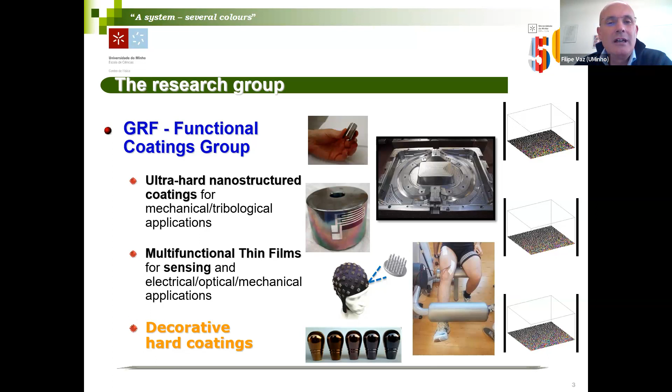And last but not least, I mean the main issue for this talk this morning, the decorative hard coating. This was one of the first subjects I studied in my career, and this morning I will tell you a few things about what we are doing in decorative coatings.

Well, we all know that decorative coatings are used in several different applications. It goes from cutleries in kitchen equipment, from door handles, whatever. And recently, there is a huge demand in terms of electrical-based applications. Whenever you are putting your switch on and off, there are some coatings, not only for decorative purpose, but also to functionalize the material, the plastics. So there is a great potential for decorative coatings, and of course the most well-known are wristwatch cases, watch bands, eyeglass frames. We all know these kind of applications.

There are several examples on the market. And of course, there are some characteristics that we need. They have to be attractive, with different colorations, but they also have to be hard and adherent, because we need the coatings to support high mechanical efforts.

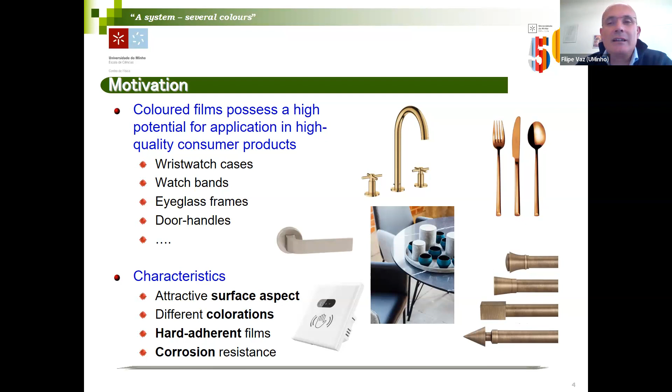And last but not least, corrosion or oxidation resistance. It doesn't matter if you have a very interesting coating with a very attractive color, in the end of the day, if it doesn't stand corrosion or oxidation.

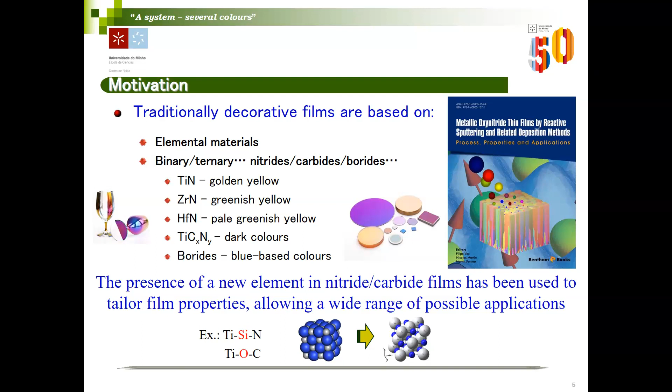There are several examples of decorative coatings. It all started more than 30 or 40 years ago with titanium nitride, but also zirconium nitride, hafnium. Then, in the late 90s, people started adding other elements - titanium aluminum nitride, titanium silicon nitride, titanium oxycarbide - meaning that by adding a third element to well-known nitrides or carbides, you could also get variations in the properties.

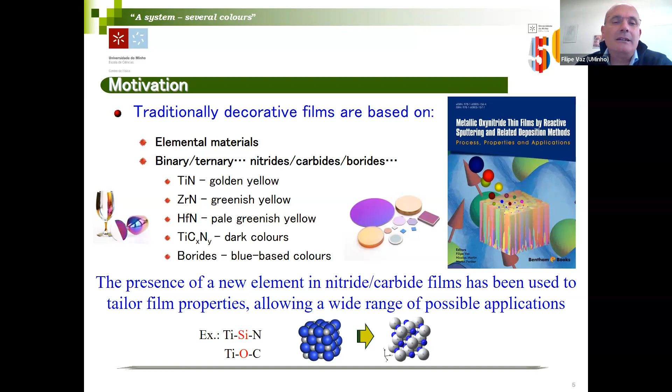Some years ago, we wrote a book, myself and two colleagues, one from France and another from Germany, giving some ideas and examples of the applications of these coatings. This morning, I'm going to tell you about some of the work we have done in a very well-known system, zirconium nitride.

and in fact, what? Sorry? Go on, Filipe. No problem. Can I go on? Yes.

So what we are doing is using zirconium nitride as a base material, and adding increasing amounts of oxygen. So what we were doing is basically going from the well-known metallic behavior of zirconium nitride towards the insulating behavior of zirconium oxide.

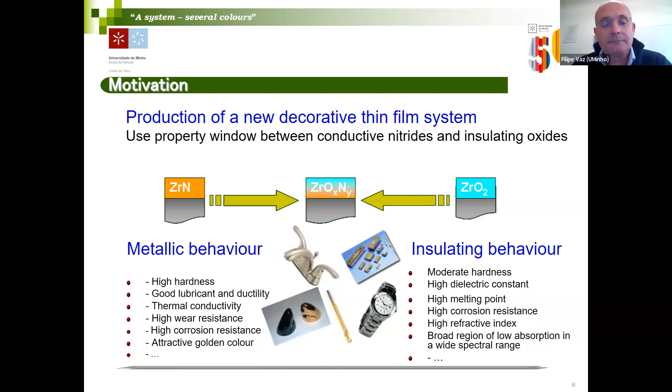What we try to do is fill up a window between two extreme materials, one metallic, one insulating. So what we did is explore everything you might have between metallic and insulating, and we were expecting to get everything between these two extreme materials, also in terms of optical properties, or in terms of color.

But what we did was always exploring one very important thing in terms of industrial applications, which is cost competitiveness. So what we use is always one target, only zirconium, and known base materials like zirconium nitride, but using a gas mixture.

Instead of using nitrogen and oxygen separately - you all know that oxygen is about 100 times more reactive than nitrogen - it means that if you put a little oxygen in the chamber, a lot of oxygen is going to appear in your coating, because oxygen is extremely reactive. So we decided to use a gas mixture.

This means we used a bottle of gas containing oxygen and nitrogen at different ratios. For instance, we used a bottle with 90% nitrogen and 10% oxygen, 95% nitrogen and 5% oxygen, 80/20, whatever. We tried different gas mixtures, but always using one gas mixture, one target, and very well-known materials, in order to get very different colors.

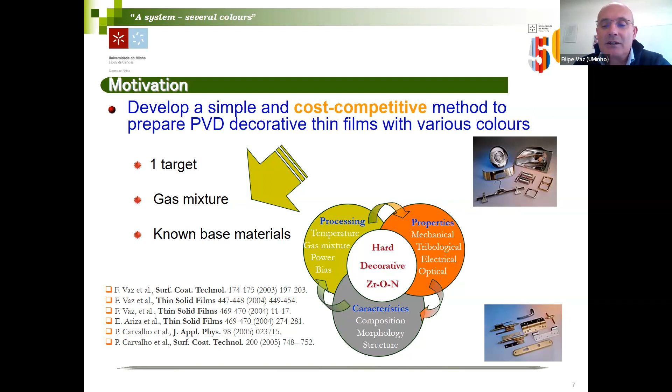And it works - because oxygen is extremely reactive compared to nitrogen, the thing worked. In terms of the production itself, just to give you a brief idea, we used very similar conditions to the ones you are using.

We could have room temperature towards several hundred degrees Celsius. Depositions were in the range of 10 to the minus 3 millibar, 10 to the minus 6 millibar as the base pressure - nothing strange for most of you, if not all of you.

But the important thing here is we were using different ratios of nitrogen to oxygen in one bottle only. So we were always using a gas mixture. And guess what - by doing these depositions with zirconium nitride, we found we could always get four different kinds of coatings.

First, a type of coating in which for very low gas flows, the colors ranged from metallic to golden - metallic when zirconium was dominant, meaning very, very few nitrogen and oxygen atomic percent.

And then golden when we were approaching the stoichiometry of zirconium nitride with some oxygen. Then with intermediate gas flows, we could always get colors ranging from golden to brownish and very dark brown.

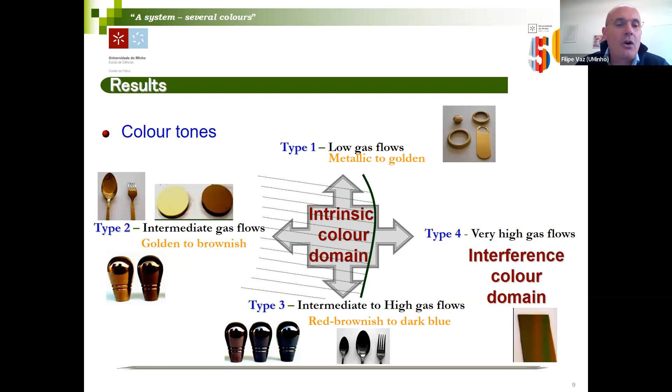Then a third type of coating where we were getting red-brownish towards dark blue, very dark, even close to black. And for very high amounts of oxygen, very high gas flows, we were getting interference colors in the coatings. So this was quite interesting because whatever gas mixture we used, we always got these four different kinds of coatings: very metallic, golden to brown, brown to dark very dark, and then interference colors.

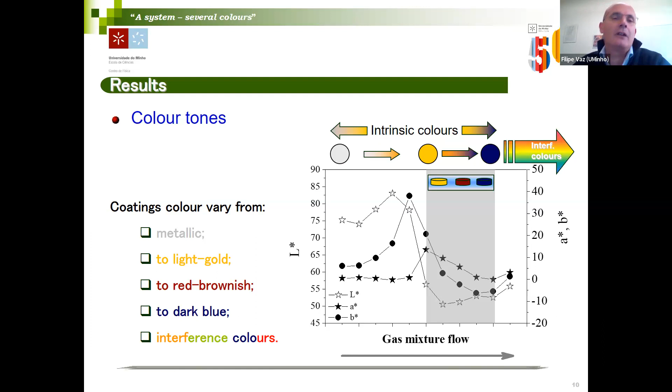You can see here in this plot the color coordinates of the coatings, ranging from metallic, light gold, red-brownish, to dark blue. It was quite interesting because you could have a very high amount of different colors, always keeping in mind we used one target, one gas mixture, and very simple systems like zirconium nitride. I'm showing you zirconium nitride, but it was also working with titanium nitride.

I can show you the four zones. There are four quite different zones of coatings. In the first one, zirconium was decreasing, the oxygen content was quite low, but the nitrogen was increasing. Then there's a zone particularly interesting, this one, where everything seems almost constant, even though we were depositing different amounts of gas mixture - this was because of the reactivity of oxygen. This second zone was interesting because we could have very interesting colors ranging from gold to brown, with different shades and tones, quite interesting.

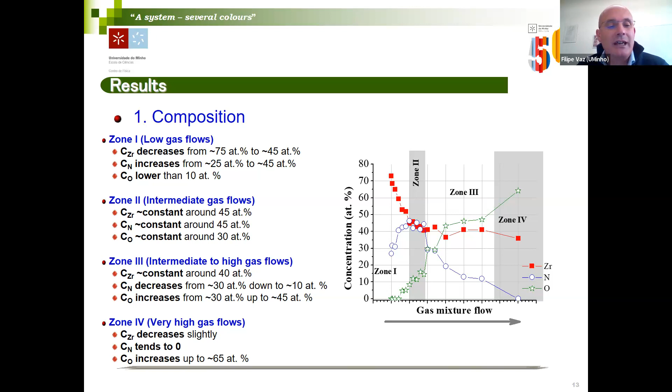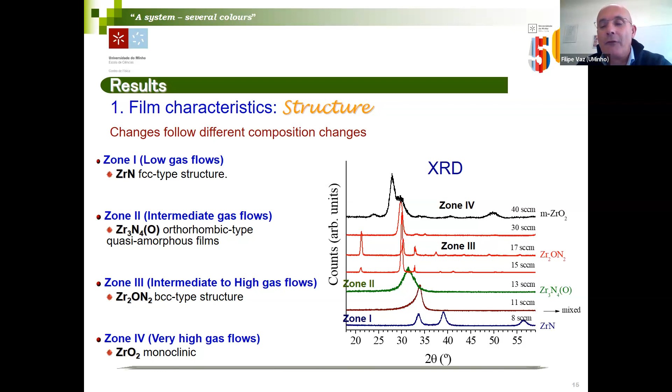Then in zone 3, zirconium is now almost constant, the nitrogen is decreasing because of oxygen reactivity, and in the fourth zone, we tend to have more or less zirconium dioxide. What's interesting is that not only was the composition changing in these four zones, but also the structure. The four different zones correspond to four different zones of structure: a zone with mostly zirconium nitride phase, then Zr3N4, then zirconium oxynitride, and zirconium oxide.

So what we could say is that you have interference colors whenever you go from zone 3 to zone 4 - when going from oxynitride phase to oxide phases. But whenever we have zirconium nitride stoichiometric or Zr3N4 phases, you have very different kinds of colors - not interference colors, but intrinsic colors. This means it doesn't matter what thickness you have, you get a very high amount of different tones.

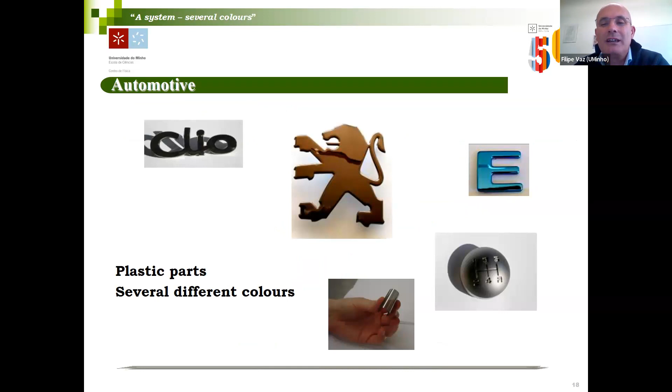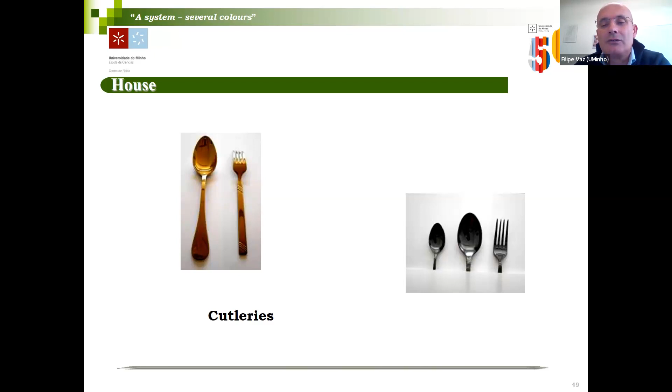I'll show you a few applications we've done - I won't mention the brands, but you all know them. This was in a European project I was involved in, where we worked with several automotive companies, but also plastics. This is one of my students with some plastic coated with a coating. We also worked with cutlery companies - we did golden and then very dark, very close to black finishes. Also bathroom equipment, and we worked with a Swiss watch company on this project, doing several things.

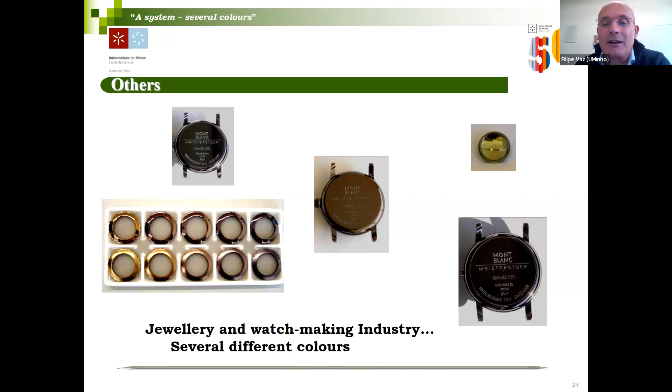By the way, one of these watches from this company, at that time, cost more than 10,000 euros, which was amazing. But the fact is it was nice because it was very dark, yet it was only zirconium oxynitride - I did this in our lab, and it was quite interesting.

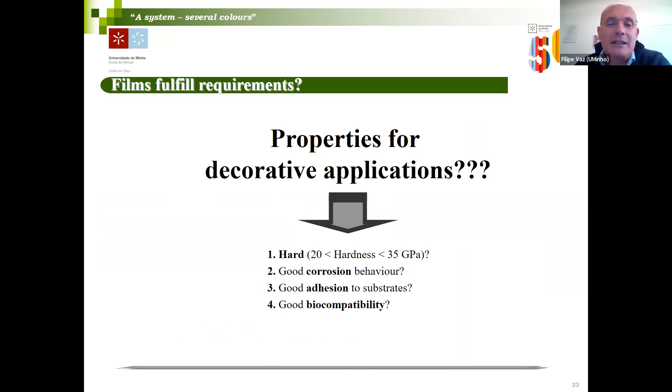Well, just to finish with some things that are very important for decorative applications - it's not only a question of different colors, attractive colors, very dark colors, very golden colors. That's interesting, but of course, we also need hardness.

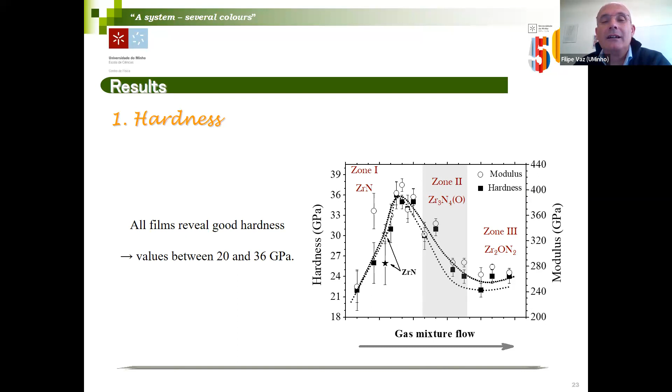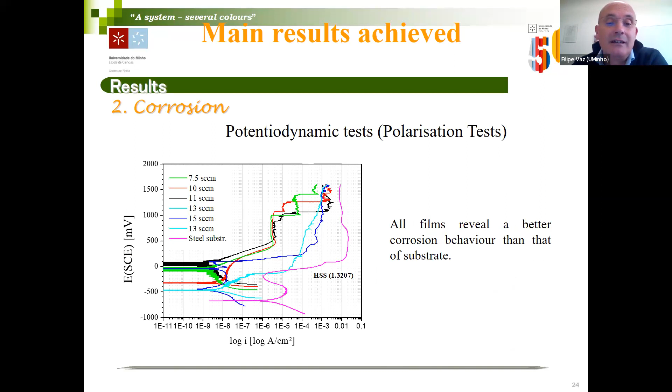It is true that the variation of hardness is also a function of the different zones, as well as the corrosion behavior, which is very important. A very interesting result was that all zones showed better corrosion resistance than the substrate itself, which was stainless steel and steel in some cases—a very good result.

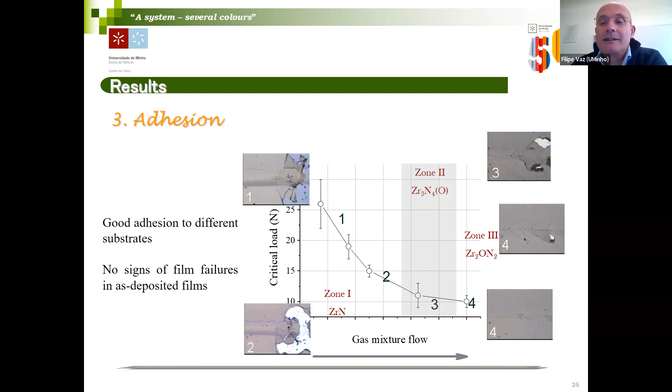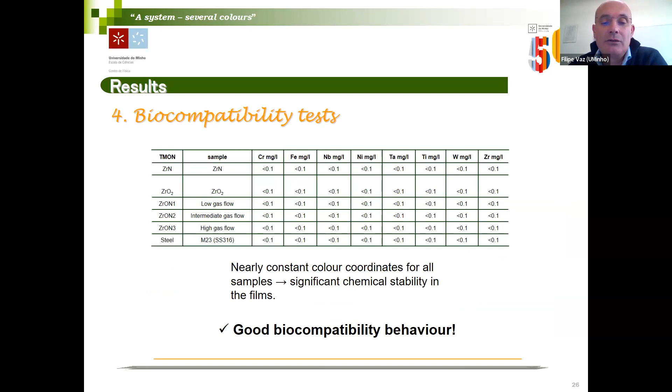For adhesion, we again saw a very high influence of the different zones, but all coatings revealed very interesting adhesion results. Of course, if you are using this in cutlery or in objects worn on the wrist, like watches, biocompatibility tests are very important. All the coatings we tested revealed very good biocompatibility behavior.

And of course, for other applications, we looked beyond decorative purposes to other uses. Electrical resistivity is one example. I'm highlighting it here because if you look, you have 15 orders of magnitude variation in resistivity as a function of the different zones.

Particularly important is zone 2, where you have a huge variation in resistivity. It's interesting because, as I showed before, zone 2 had almost a constant composition of the coatings, which means the structure is playing a decisive role here.

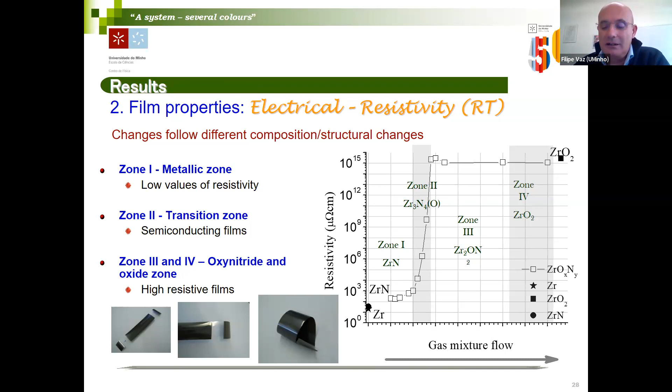We looked at this using different techniques like XPS, and we saw a very big variation—not in composition, but in the types of bonds that were formed. So for electrical applications, it's quite interesting because you have such a huge variation in electrical resistivity, allowing you to tailor the coating to the application.

I hope I respect the time. We showed that it's possible to control some of the main drawbacks for industrial applications. You need a very simple process in terms of industry—you can't use a process where you need to control nitrogen, control oxygen gas, control the color separately.

I tried to show you that it's possible to get very different colors of coatings, very different mechanical behaviors, very different electrical behaviors, and so on, just by using a very simple process—one target, one gas mixture, and very well-known systems. Thank you so much for listening.

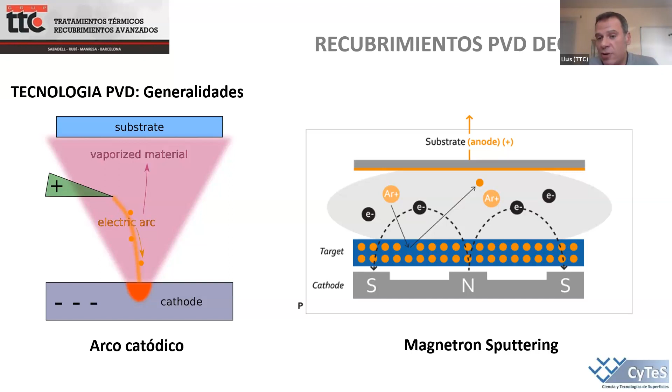En ese sentido, el arco catódico, ¿qué ventajas puede tener frente al magnetrón? Pues que es mucho más fácil de utilizar, es decir, el ajuste del proceso es mucho más sencillo. Podemos obtener capas estequiométricas prácticamente sin problema. Con el magnetrón es un pelín más delicado, incluso diría que difícil, pero en el caso del arco es muy

sencillo y en nuestro caso nos resulta muy útil. Al ser una descarga eléctrica de alta potencia, tenemos una nube muy densa de material que nos va a repercutir en una alta tasa de deposición o un ritmo de crecimiento de esa capa muy rápido. El magnetrón en este sentido es más lento.

Tengo que decir que ser rápido no tiene por qué ser una cosa buena. Tendrá sus aplicaciones en las que será mejor porque nos dará mejor productividad, pero seguramente vaya en detrimento del control, sobre todo en el control del espesor y sobre todo en las capas de

interferencia, como le llamaba Filipe, puede llegar a ser un problema. Además, el arco catódico intrínsecamente genera macrogotas de material que se llaman droplets que se van a incorporar al recubrimiento. Eso significa que en un recubrimiento, vamos a decir, de nitruro de titanio, podemos tener gotas de material metálico embedido ahí dentro de esa capa. Puede ser un problema, puede no serlo, depende una vez más de la aplicación.

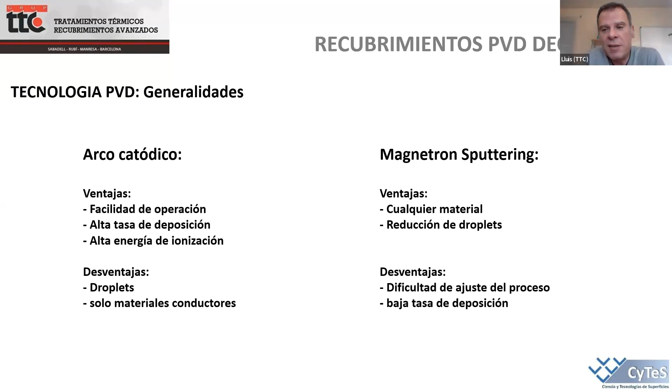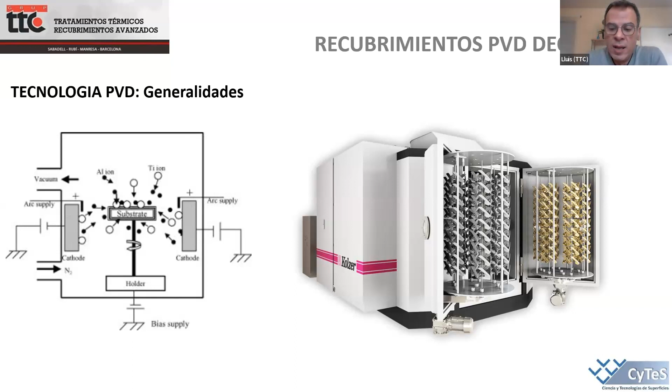Como generalidad, podemos decir que es una tecnología limpia, en comparación sobre todo con procesos de cromado. Por eso se está intentando utilizar la tecnología PVD para sustituir los cromados tradicionales, ¿vale? Sería una aplicación decorativa, pero también con un punto técnico, es decir, no sería un componente puramente estético, sino que hay un tema de resistencia a la corrosión, etcétera.

Eso no es una aplicación decorativa propiamente dicha, pero creo que cabría mencionarla. En comparación con los sistemas de recubrimiento tradicional, más basados en galvánica y demás, la tecnología PVD tiene un coste económico superior a todos estos tratamientos convencionales, con lo cual, en principio, a priori, solo tendría sentido hablar de ella para componentes o piezas con un cierto valor añadido donde quepa este extra coste en su estructura de costes. Y después está la parte estética, que esto ya depende un poco del gusto de cada uno, ¿no?

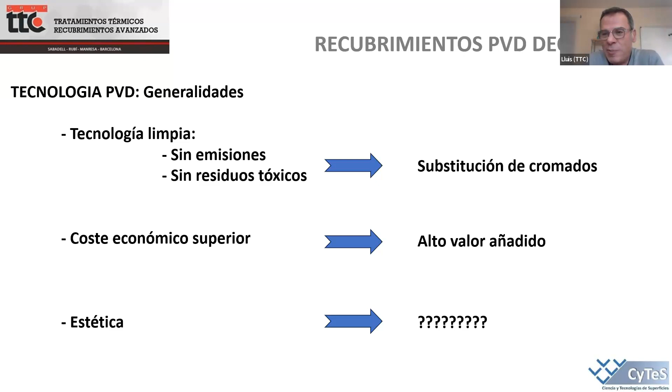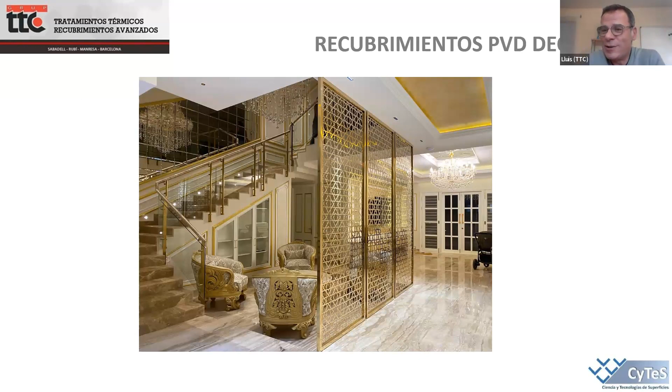Aquí alguien podría considerarlo un poquillo hortera o a alguien le puede gustar mucho. Eso, sobre gustos, colores, y nunca mejor dicho.

Entonces, históricamente o ya tradicionalmente, sobre todo la tecnología PVD en decorativo se ha usado mucho en grifería. De hecho, hay una empresa en España, o más de una, pero ahora tengo una en mente, que ya hace muchos años que se dedica a hacer grifería.

También las manetas de las puertas. También hay otra empresa de España que ya hace muchos años que tiene capacidad productiva para recubrir manetas de puerta. Últimamente se está poniendo de moda recubrir las carcasas de los móviles también, aunque todo esto ya viene hecho de China. Y después, aplicaciones decorativas diversas.

Filipe ya ha hablado de piezas para baño, cristalería, y demás. Todo esto son aplicaciones ya, digamos, típicas de la tecnología PVD decorativa, ya bastante implantada en la industria.

También carcasas de reloj. Hubo hace 6 o 7 años quizá ya, que hubo un boom con el color negro, donde se impuso el DLC para carcasas de reloj. Y, en fin, posibilidades infinitas. Lo único que ocurre es que hay que intentar adecuar ese coste a que la pieza o el componente realmente lo merezca, ¿no?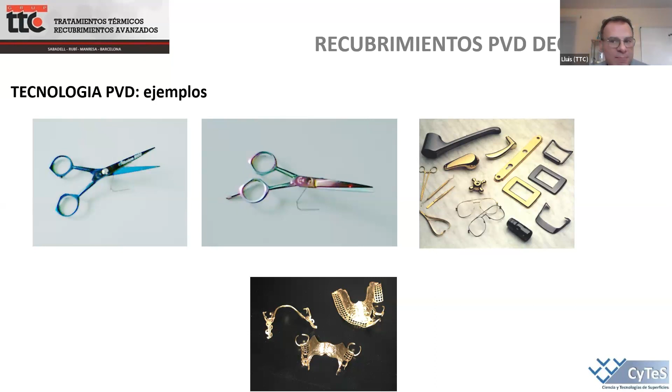Entonces, realmente, bueno, hay un mercado para ello, pero realmente son nichos. Hay que encontrar ese nicho y encontrar el tipo de color, el tipo de tono, el tipo de aplicación que al cliente le pueda gustar, ¿vale?

Entonces, volviendo un poco a retomar lo que decía Filipe de colores intrínsecos, y esta vez basados en nitruro de titanio en este caso, básicamente de colores intrínsecos en el mercado que yo conozca se está llevando el color plata, el color oro, el color bronce y el color negro.

El color plata se puede obtener depositando directamente titanio puro, cromo puro, aluminio, acero inoxidable, pero van a ser recubrimientos de baja dureza. Estaremos hablando alrededor de los 400 Vickers, 500 Vickers, depende un poco del material. Entonces, si queremos un recubrimiento que nos dé cierta dureza y, por lo tanto, cierta durabilidad o resistencia al desgaste, tenemos que pasar a nitruros.

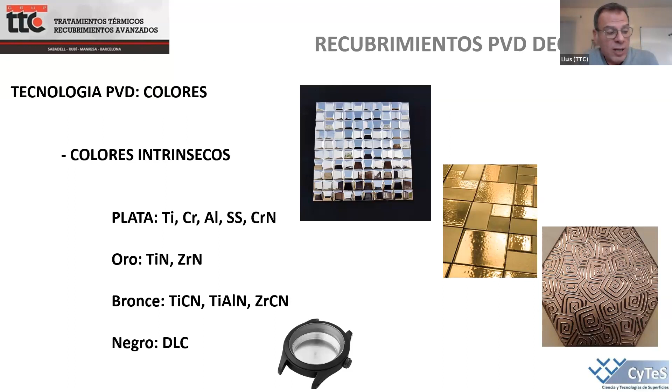Y como ya decíamos antes, para el color negro, pues el DLC en sus distintas variantes.

Volviendo también y repitiendo a Filipe, tenemos los colores de refracción o de interferencia, o como queráis llamarles. Estos básicamente se obtienen gracias a la deposición de una capa de óxido de titanio, que lo que nos va a hacer esa capa de óxido de titanio es cambiar la refracción de la luz incidente. Con lo cual, al reflejo veremos un color o veremos otro. Y aquí es donde es muy importante controlar ese espesor de esa capa de óxido de titanio, porque en función de ese espesor obtendremos toda la gama de colores que podemos ver aquí.

Realmente, a nivel industrial, es muy difícil obtener cierta reproducibilidad en este tipo de recubrimientos. Sobre todo en cámaras grandes, donde hay muchas piezas dentro, es muy difícil. Con lo cual, para piezas muy grandes o con unas geometrías, por ejemplo, una pica de lavabo, para esas geometrías tan dispares, es muy difícil obtener una homogeneidad.

Y diría que es difícil tanto con magnetrón como con arco. Es decir, aquí intentar obtener un color constante siempre con una capa de interferencia, con una capa de refracción, va a ser muy difícil. La geometría de la pieza tiene que ser agradecida y nos lo tiene que permitir, y no podemos hacer cámaras demasiado grandes para obtener esa homogeneidad de color.

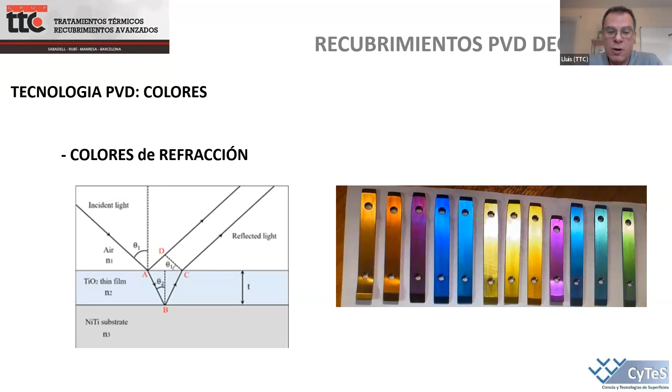Todas estas capas que vamos a depositar tienen que tener una cierta dureza porque queremos que duren en el tiempo. Ya hemos dicho que las capas de cualquier metal, sea titanio o cromo, van a ser blandas. Las capas de óxido de titanio también van a ser blandas, con lo cual ahí tenemos un compromiso: podemos obtener un color que nos guste muchísimo, pero puede ser que se degrade muy rápido en el tiempo. Por ejemplo, en el caso de la cerámica, al recubrir una baldosa con titanio metálico, que es un material blando, esa baldosa no se podrá usar como pavimento en un suelo, porque al ser blando, con los zapatos lo vamos a rayar y va a durar dos telediarios. Entonces, siempre que se pueda, se van a escoger materiales cerámicos: nitruro de titanio, nitruro de circonio, oxinitruro, carbonitruro; cualquiera de estas nos puede servir.

Coeficiente de fricción, entiendo que no es un dato importante para aplicaciones decorativas, pero bueno, ahí está. Y como venimos de donde venimos, que es la aplicación más técnica o más mecánica, pues aquí está. Y la protección a la corrosión, que es la eterna discusión.

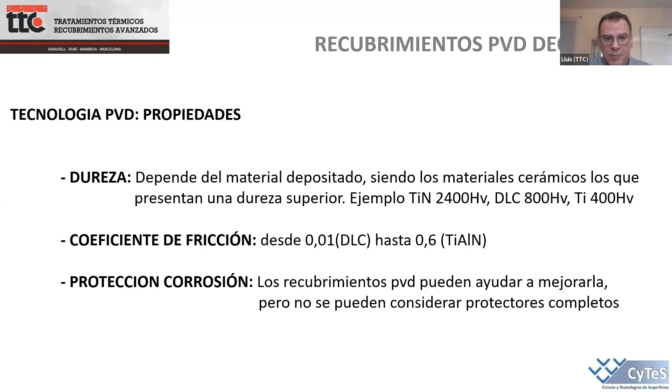Simplemente, para que esa capa decorativa que hemos depositado sea perdurable, necesitamos asegurar que tiene buena adherencia, que tiene cierta dureza, y cuanto más espesor tenga, más nos va a durar. Resistencia química, pues me vuelvo a la cerámica: si vamos a recubrir una baldosa que va a estar montada en una cocina, y vamos a meterle lejía, etcétera, tiene que tener una cierta inactividad química en ese sentido.

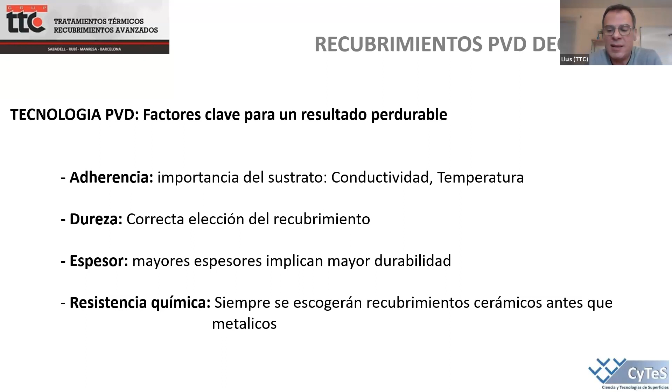Por lo que respecta a los materiales cerámicos, para recubrirlos, tenemos que pensar que es un material no conductor, con lo cual no podremos atraer esa nube de iones que generábamos hacia el sustrato mediante un campo eléctrico, con lo cual la adherencia en los materiales cerámicos va a ser mala. Tiene un problema añadido, que es que tiene una cierta porosidad en función de si es un porcelánico, un grés, un mármol, etcétera, que nos va a complicar el hacer vacío en esa cámara. Pero por contra, la cerámica es un material que nos permite calentarlo casi tanto como queramos. Entonces, hay que encontrar un compromiso entre todas las variables.

En el caso de los polímeros, todos ellos son no conductores también, con lo cual este mismo problema de no poder atraer los iones hacia el sustrato lo tendremos. Eso nos implicará también una peor adherencia que en el caso de un material metálico. Además, la mayoría de los polímeros presentan gases ocluidos que también complican bastante el sistema de vacío necesario. En ese sentido, las experiencias más satisfactorias con polímeros a nivel decorativo son siempre sobre ABS, policarbonato o metacrilato.

Finalmente, los metales son los más agradecidos porque son los que nos permiten calentar, no tienen porosidad y son conductores, y nos permiten controlar cómo atraemos esos iones sobre el sustrato. Entonces, hay que tenerlo presente en función de qué se quiere recubrir y cómo.